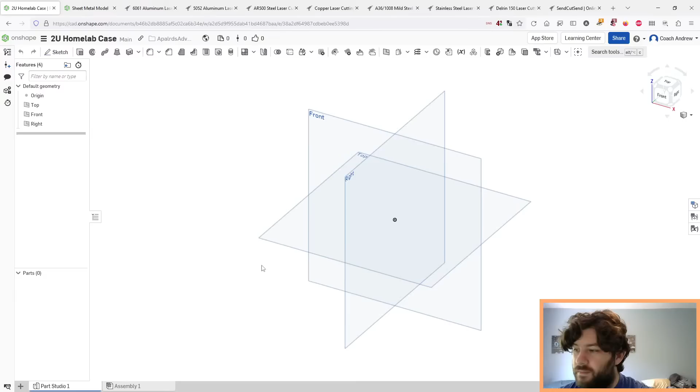So for inspiration, I kind of want it to look like this. Not the trash can. The, like this. This looks really beautiful to me. I know it's wildly expensive, but I just like the design of this. So I want the front of my server to be aluminum, like nice looking brushed aluminum. So yeah, it is a gorgeous case. You're right. I'm not going to buy one and turn it into a low-end server. That would cost me more than the rest of the server combined.

But we can make one out of aluminum. So our options here are 6061 or 5052. I believe 5052 is cheaper. Also, we could make it out of copper if we want to pay a ton of money. AR500 tool steel. Yeah, most of the case, I think I'm going to make it out of mild steel. Could make it out of stainless steel. So, yeah, stainless.

Motherboard inserts and stuff I could make out of Delrin, or I could use rivnuts they make. And yeah, so most of the case, 5052 can be more easily bent. SendCutSend won't bend 6061 at all, but that doesn't mean it can't be bent. It just means that they won't do it.

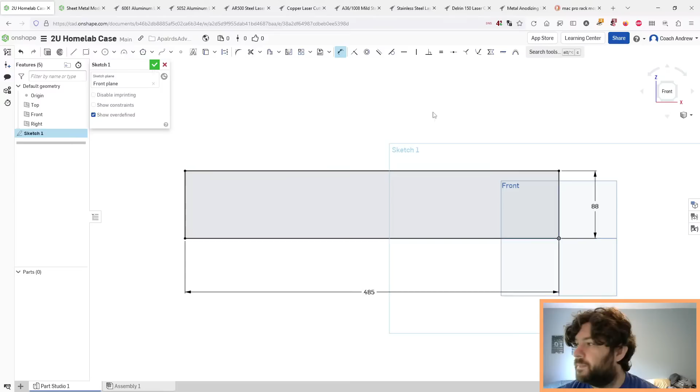And we're going to turn that. Actually, this one's just going to be a plate, I think. So thinking of construction methods, I guess I could pull the other one over here. Basically, I wish I could draw on my screen.

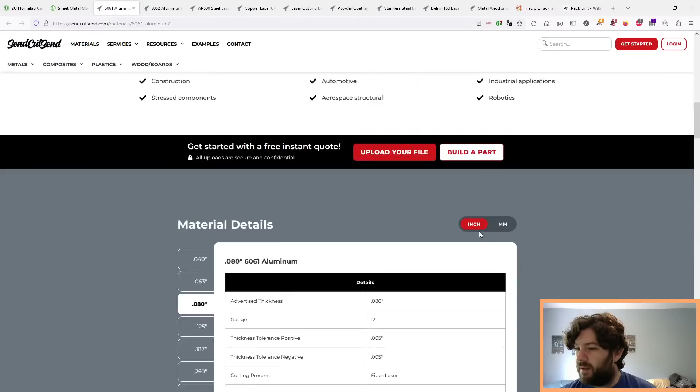Okay, so we are going to make the front panel out of 080 aluminum because it's beautiful. So in that case, we are going to make you sheet metal. Yes, do sheet metal. Thicken. What thickness is 080 aluminum in metric? 2 mil. 2.03 mil, bend radius of around 60, 61. It has no bend radius. So I'll take the one from 50, 52. Not properties. 2.9 mil, material, relief. Yes, I like you. Okay. We now have a panel.

Yeah, mounted as a shelf for support. I actually have a... it's going to sound awful. I have a UPS on the bottom of my rack that kind of holds up the stuff above it. And then all the switches go down from the top, and the servers go up from the bottom, and in the middle there's just a gap. And I used to just set my cable modem on the gap, on the server. But that got really irritating, so I got a proper shelf. Cable modems, it's the worst. Yeah, the UPS was designed for two-post network racks. So I looked at the hardware and I'm like, there's no way this supports that huge battery overhang, but it does.

Math. So I'm going to do 3 holes apart, which would be 0.625 times 3 into metric. 47.625 millimeters. So your dimension here to here is 47.625 metric. You're going to be the same. Let's see, so my total height is 80 something. I need to split the difference here.

So what would this dimension here be? So that's 88. And we want to do vertical. 88 minus 47.63 over 2. And then we'll just set it equal to... I'll go in this dimension, please. Yeah, 0. Okay, so how far apart are you? Wikipedia.

What is the width? Pitch of the holes, not like the 19-inch. I'll just measure it. In real life. 47. My current one has slots. I need to make slots.

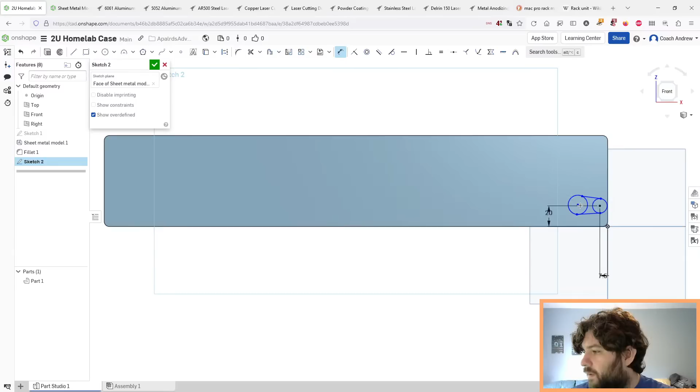Measuring tape. 46 and a half. 462. Oh, minus 470 minus 462 over 2. Yeah, it's tiny. And you need to be horizontal, you to you. Nope, does not like that. Yes, we'll dimension you in this dimension. How big are rack holes?

Number 12. Jesus. M6. Okay. Pretty sure my rack screws are massive. They are the universal square type. So an M6 would be a 6 mil. So you need to be bigger than 6 mil. So you need to be like 6.25 mil. I think. Yeah. And you need to be equal to, whatever, I'll just retype it. And you guys need to be tangent.

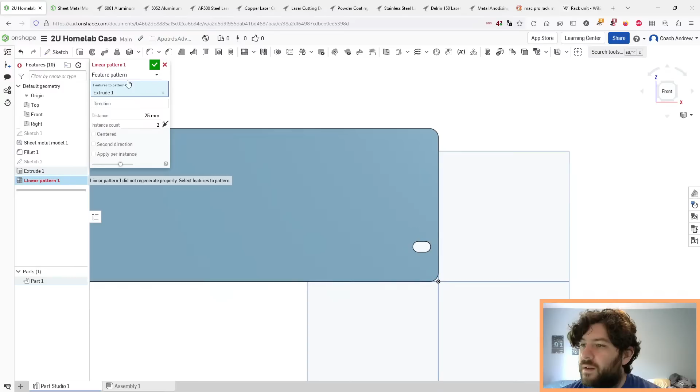Feature extrude. Direction. We're going to go with Z. How do I pick Z? Feature to pattern. Extrude. Direction to pattern. No. And to pattern you on the face. Why are you having such a hard time? That looks right. Okay. In that dimension, and you need to be 48 mils. Boom. Actually, it's not 48. It's, God. 47.625. Okay, now we got you.

Now we're going to take you two, and we're going to pattern you. Please. Pattern you. Feature pattern. You and direction is going to be this way. And how far apart are you? Measuring tape. .66. .466. Finally. Have a face. This is our faceplate.

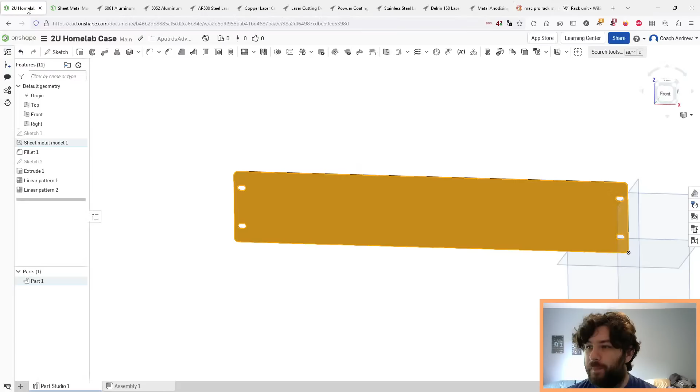Okay, so what pattern do we want to put on the face? Our inspiration is the beautiful Mac Pro. So I'm going to sketch a hole and do a bunch of holes. Nope, we're not going to extrude. We're going to sketch. And we are going to make a hole. How big should it be? 33 mils, that's a bit big. How about 16? Yeah, let's do that. Okay, you're going to be the first hole.

Oops, you need to come from here to here dimension. Maybe a little bit closer to the edge. 60 mils. Yeah, that seems reasonable. I'm going to have, I don't know, 3 rows of you, so we need to fit, come on. Sketch lines in the middle. Yeah, you're right, it would be. That might make the rest of this faster, too. We'll see. 24 mils, 20 mils. You know what, 88. Maybe I should do 24 for you. 14. It's too close to the bottom. 18. That looks good.

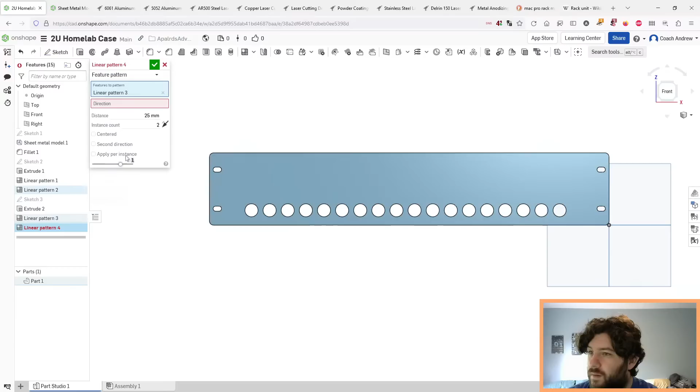Okay. Now can I take my pattern and pattern that? Feature pattern. You guys are going to go in this direction. We're going to be offset by 25 mils. Second direction. Oh, that would make a symmetrical grid. I want an asymmetrical grid.

Let's rethink our life choices a bit. Yeah, so maybe I need another one that's offset. You, sketch 4. Come back. How big did I make you? 22. I think I made you 20. Made you 16. Okay. 16 mil, we decided. 15 mil.

There to 38. 36 looks reasonable. 40. Meh. 50. Meh. 52. 48. Let's try that. Oops, nope. Stop. To do you and remove through all. Okay. Now I have two holes.

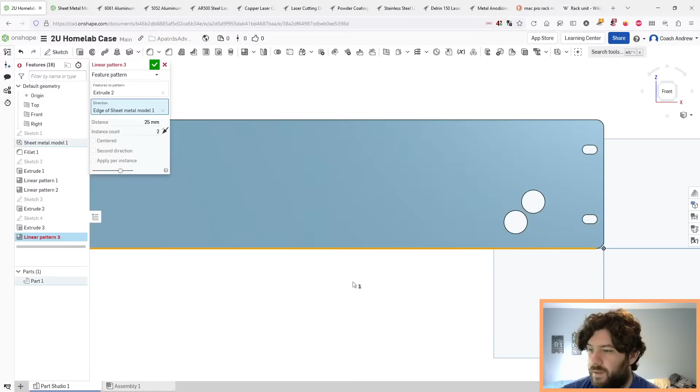Now I can pattern these two holes separately to make my pattern. You are a feature pattern, and your feature is extrude 2. And the direction is going to be that way. Direction. That way. Reversed. Actually, if I do it this way, it'll let me know if they're lined up. That looks pretty lined up to me. I'm pleased. Okay. Now I need to make you go all the way across. I think I need 16 of you. 16. Might be too many. I guess we'll find out.

And now next we have to pattern the next one. Spending so much time on this beautiful front panel before I even make the rest of the case. Features to pattern. Extrude 3. Direction. Edge. Flip. You're also going to get 16. Yes, I like that. Now we're going to pattern you up.

So we're going to pattern feature extrude 2 and linear pattern 3. Direction is going to be up. Nope. Direction is going to be up. And you're going to be in the other direction. 25 is too low. How about 30? I don't remember what dimensions I typed. That doesn't look right. That looks too tall. How about 28?

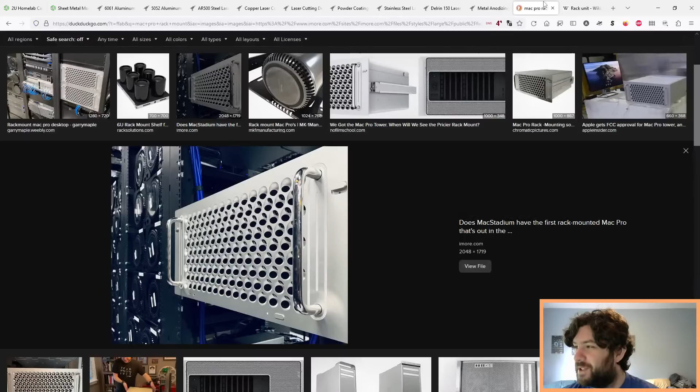One more linear pattern. I'm just going to do through holes. My actual plan to make this look better than the cheese grater was to have 2 layers. So the first layer would hold the through holes, and the second layer would hold the fans. So I could put an offset set of through holes to make it kind of look like a cheese grater without having to actually make a cheese grater. Because making a cheese grater is a lot more expensive than making through holes. But if I have my fan piece behind it that mostly looks like an offset of holes, I think it'll look pretty good. So now we need to pattern the middle row.

Up. So we're going to feature pattern. We're going to pattern extrude 3 and linear pattern 4. And direction is going to be that direction. You're going to go up. I think they are 20 mils. No, that's not right. 26. 28. That looks better. Okay. So now I have something with good airflow that resembles a Mac Pro.

The other option I have is to just acknowledge that it's not going to be as nice looking as the beautiful cheese grater here, and just have a big bunch of through holes. Okay, so we have a front panel. And I should probably rename this to front panel. So now if I go back to my folder, I can start making a tray for the motherboard. Come on, Onshape.

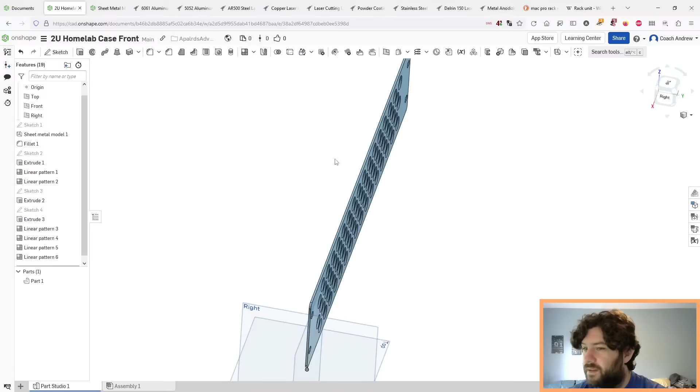I don't know. I like the look. I'm going to keep the cheese grater exactly how it is. Okay, so now we need to take you and features. The left one looks better. So I need one less hole on this side. I need to change the spacing. I'm going to leave it. Create document.

Motherboard tray. Okay. Now we get to the fun part, laying everything out. So this will be somewhat based on what I have space for, because I think I have space to go 50 centimeters. So your sketch is the top plane. I'm just gonna draw a rectangle, and that's gonna be the inside dimension of the case. And this will form the motherboard tray. You are currently 40. You are currently 43.5. Okay, so we're going to be 430 wide. So this is the inner dimension, because then the flange goes out to mount to the rack.

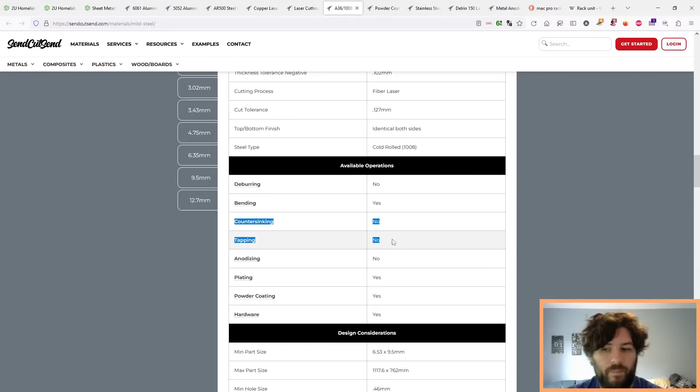Please thicken. And we are going to use mild steel. My options for mild steel are 030, 048. 048 is probably thicker than I need. That is 1.22 mil, so 1.125 mil. I really like 1 mil, but it's probably strong enough. Certainly strong enough. So this one can get press fit hardware, powder coating and plating, and bending. I don't get countersinks. It's too thin to tap and countersink, and that's fine. I'm not going to countersink my motherboard tray.

Let's see. So you are sheet metal 1.22 mil. 1.22 mil bend radius. 1.4. 0.87. Bend deduction, that's the one I need. 2.18. Material, K factor, 0.38. What are you mad about? Come on. Oh. That's a big face. Okay. There we go. We've got a motherboard tray. Congrats. So I need to think about how big my motherboard is going to be.

So if I look at Wikipedia, ATX form factor. I think they have dimensions here. So I'm doing micro ATX because used micro ATX motherboards are really cheap. But I also want to be able to fit full-size ATX. So that's going to be my assumption. So 305 by 244. Let's go make a sketch that is 305 by 244, and that is going to be the motherboard. Actually, what dimension's what? Okay, 305 is height. 244 is depth.

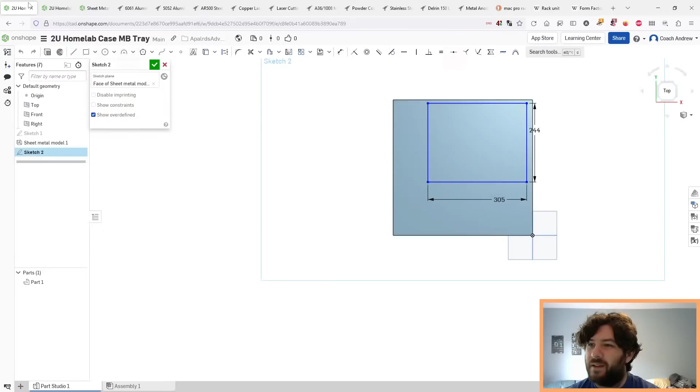Yes, I know this will be more expensive than the motherboard and the rest of the electronics. Part of the other thing is I already have a micro ATX motherboard, and I already have a second micro ATX motherboard on the way. Basically, yeah, I know the case is going to be more expensive than the rest of the electronics. The CPU might be more expensive than the case. The GPU definitely would be if I put a GPU in.

Goddamn crypto miners. Actually, thanks to the crypto miners, we can now get used GPUs from a couple generations old that had a hard life.

So there's the micro ATX. Also, so I'm thinking of what I/O I need. I need a CPU, obviously, and I need RAM, obviously. I want a 10 or 25 gig card.

A 10 gig card can use a PCIe lane off the chipset. Even PCIe Gen 2, I think Gen 2 x4 is fast enough for a single 10 gig, and Gen 2 x8 is fast enough for a dual 10 gig or a single 25 gig. So I don't need two graphics cards. I'm planning on putting a graphics card in these.

I currently have, digging them out here, the two NVIDIA Tesla P4s. I bought these back when Craft Computing did a video on them, and they were awesome.

What's going on here? YouTube is stuttering. Happy again, YouTube? Stream is healthy. I don't know why the stream is unhappy.

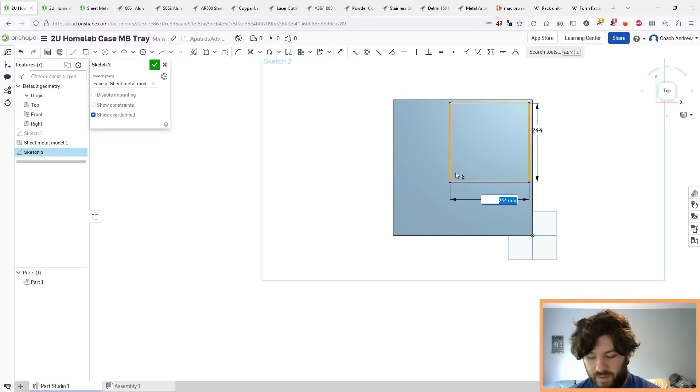So basically, I need 2 PCIe devices in each server: one is the networking card, and the second is the graphics card. And then, what else? The motherboard will have 2 M.2s, I think, and 4 SATA. That's what I have right now. The plan was to hook all of my drives up to the internal SATA on the motherboard, which means I can't use SAS drives.

I know I asked the question and people said they wanted up to 4 hard drives or up to 8 SSDs. My plan was essentially to build this thing to fit 4 2.5 inch SSDs and wire those straight to the 4 SATA ports on the motherboard. That would let me build a ZFS RAID Z1, or I could use it as 4 Ceph OSDs in a cluster. I think 4 2.5 inch drives is reasonable for most people now.

I don't think 3.5 inch drives have a ton of life left in them for daily storage. For archival storage, they're still great. Or for backup storage, your second tier, the SAS 3.5 inch drives are awesome because you're not as concerned with speed.

Yeah, latency. Latency with Looking Glass is not bad. Looking Glass does a frame buffer copy straight out of the GPU, so it doesn't capture the HDMI. As soon as the frame is rendered, it takes that frame buffer and copies it into the memory of the host from the virtual machine.

So the virtual machine has its GPU and it's rendering on the GPU. As soon as the rendering is done and the frame is ready, it does a memcopy out of GPU RAM into host RAM that's shared by Proxmox, where it can then take that and composite it on its own Radeon card.

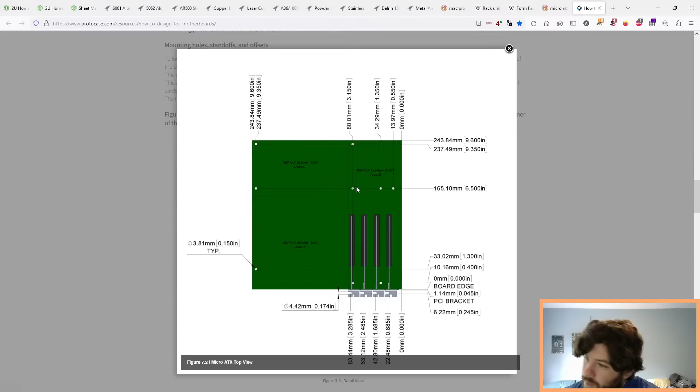Somewhere down here they had ATX board, micro ATX board. There we go. Okay. That's a PCI card. There we go. So they're doing 3.81 mil holes. Keep out area A, keep out area. So where are they referencing their dimensions from? They're referencing from this corner down here. Okay, so that will be my reference.

So I need 1, 2, 3, 4, 5. That's a lot of mounting holes. Let me look at the motherboard I have. B450. I think it's this one.

Yeah, this looks like the board. So it has a hole 1. Do you have like a front? Yeah, there we go. So this is the top. So 1 mounting hole, 2 mounting hole, 3 mounting hole, 4, 5, 6, 7, 8, 9. So they skipped out on a hole here, I think. And this particular hole here they skipped out. Because that one down there doesn't count because it's not plated.

1, 2, 3, 4, 5, 6, 7, 8. Okay, so they skipped out on the bottom one here. Or did they? Yeah, they skipped out on the middle one here. Okay, so I need those holes. So they are 3.81 mils. So 1, 2, 3, 4, 5, 6, 7, 8. And we're referencing from this corner in this diagram. 3.81. 3.81. 3.81.

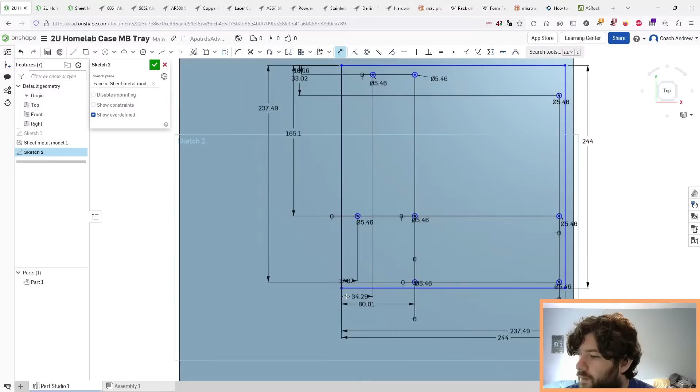Okay, that is the motherboard tray for a micro ATX board. So now where do we want to locate it in space? So the cards stick out the back. So, nope, go back. I liked that picture. Top view. Okay, so at 0 is the board edge. So at 1 mil is where PCIe brackets want to start sitting at. So I'm going to put the board edge 1.14 mils from the edge of my case, which would be U to U. Right there.

And where do I want to put the board edge in that dimension? Give it some space for wiring. How much space do you need for wiring? How about a centimeter? 10 mils. Okay, fully constrained. So now all of these holes need to get drilled. One, two, three, four, 7, 8. We're going to go all the way through.

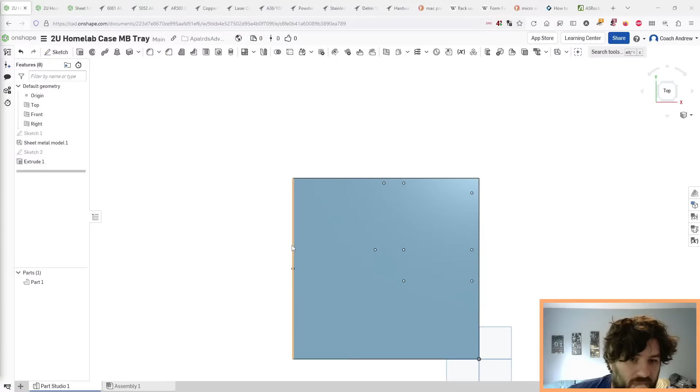So I go back to my front plate. Where do I want to attach to? Because I don't want to put too many screws in the front plate because that would look ugly. But I could put some big fat flatheads and countersink them. That would look nice. What hardware do I have? And nuts. Press nuts. M6. Big fat M6. Maybe M5.

Yeah, so printing would be more of a temporary thing. Sheet metal would be rock solid. The other thing is I kind of want to mount these sideways, so I could only hold them in by 2 screws and just overhang them. The other option is I could build a flange that goes on each side and then has a flange to screw down, and I could just put the fan in the side.

Because I kind of want to mount these, going back to my CAD, in this orientation, with the cables coming out the side, so I can route the cables like this instead of having the cables come out the back. That's the thought.

I could just build separate brackets for the drives too, or I could hold the drives in with double-sided tape because they're super cheap Amazon SSDs. I know. Or I could put some PEM nuts in the design and make the option to use either a hard drive or an SSD caddy, and make 2 different versions of the caddy that bolt onto the same PEM nuts in the motherboard tray.

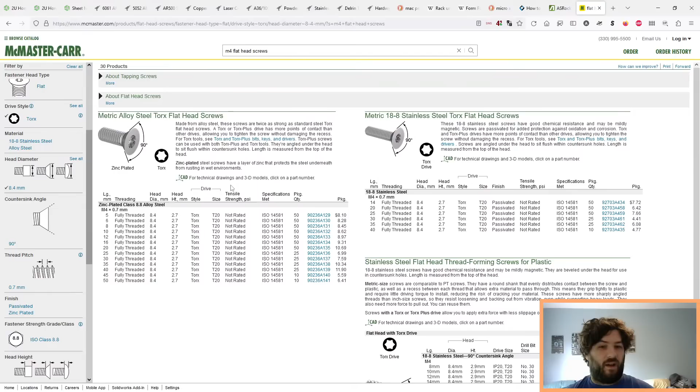Fastener type flat, drive style Torx, head diameter. Okay, so you're going to have an 8 mil head diameter, and your countersink is 90 degrees. So how deep is that? Because the thing I'm worried about is I'm using 1 mil thick steel for the top of the case. And if the screw head sticks up, that takes away from my total thickness, because I don't want to hit the next thing in the rack unit.

So maybe instead of the flange flipping over, the flange should be part of the other piece. So I'm going to delete those flanges, and instead put the holes on this side and make the top flange down. I could flathead, but I'm only using a 1 mil thick piece of steel, or even less. Maybe I set it at 1 mil. Okay. What is that in inches? 0.048.

That's what I'm using for the motherboard chassis, so the motherboard case, which is the bottom, and also for the lid. They're going to be 0.048 steel, and I'm going to paint them black, or just leave them. I don't know, depending on how much it costs. So 1.22 mil. So I should lower these. Yeah, I guess we're okay.

So now here, we're going to sketch on you. And we're going to make some holes for the bolts. I'm not going to countersink them. I'm just going to use M4 button heads. And I'm going to use 6 of them to hold the lid on, because it's structural. The lid is structural. I'm not going to have any rails on the inside to support the server when the lid's off, because this is supposed to be low cost, well, lowish cost.

So you need a 4 mil, so I'll make you like 4.25. Itty bitty, okay. You're also going to be 4.25, because this is a clearance hole. So then I'm going to use a button head through the motherboard case and into the PEM nut that's in the lid. Or I put the PEM nut here and I have the lid wrap around it. Which one of those do I like better?

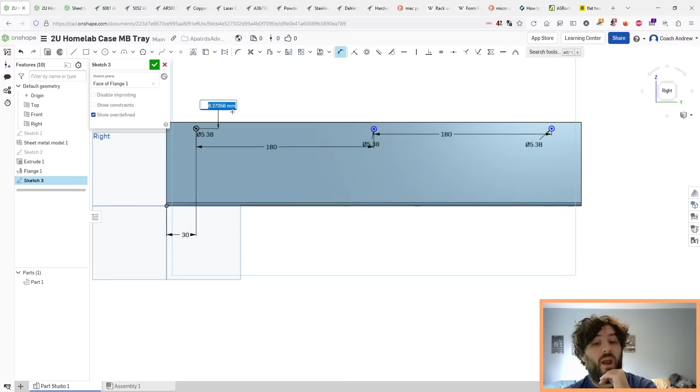it's going to have a 20 mil flange. It's a 20 mil outside flange. So I should have this flange end a little bit low to have an undercut for the bend radius of the top surface. So 5 mils is too low. What's your clearance to the edge? Center line to edge, 272. So you need a 7 mil clearance to the end. So I'm going to put you at 9 mils.

And then I'm going to take another mil off this flange. I already took some mils off. I'm going to take one more. Sheet metal thickness, 48 thou, which is 1.22 mil. Oh, and yeah, so your holes need to become not a figment of sketch. So we're going to move you, move you, and one more, and we're going to go through all. Then I'll cut the other side at the same time.

Is it enough to sink the PEM nut in it? So if I look at this from the front, the top lid is going to come over the top and then bend around the outside. So the PEM nut is going to be on this side, and the fastener is going to come in from the outside through the lid, then through the wall of the motherboard tray and then into the PEM nut. So that's going to compress the PEM nut. So the PEM nut is going to be in compression. It'll be fine.

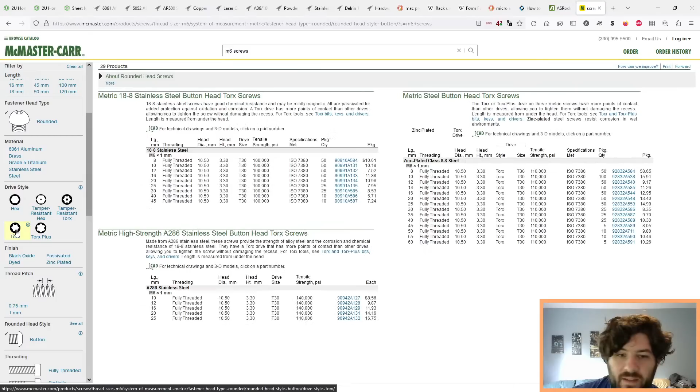So that leaves me with stainless or steel. So this is what it looks like, and those are going to be in the slotted holes holding it up. So then I want some more screws that attach the motherboard tray to this piece and the lid to this piece, and then I'm going to flange out the motherboard tray so that it sits behind these slots here and also gets held in by those slots.

So for the screws in the middle, do I want to use big stainless M6s? Or should I use like an M4 flathead? Probably use an M4 flathead, shouldn't I?

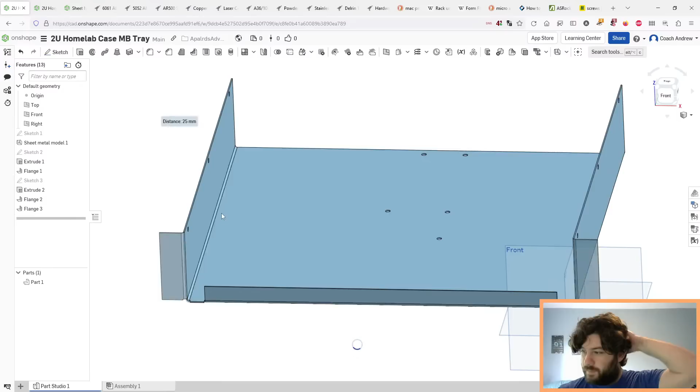So this is basically going to sit in front of the rack rail, and it's going to have a slot in it so that, in its final form, this piece can go in front of it and look beautiful. And that will also give some stiffness to it. Okay, so I'll make those slots later, and I'll make these PEM nut slots later. So that is the motherboard tray, I think.

I'll probably have to project stuff later for mounting holes and stuff, but I should figure out how to make assemblies in Onshape, because I still don't know how to do that. Yeah, I haven't done sheet metal design in a while. I am actually a computer engineer, but I hung out with enough mechanical engineers to learn some things.

Versions and history. How do I add a part? So I'm in part design. Oh, you're a part. Maybe I should have done this all in... Oh, assembly. Yeah, that's what I wanted, is assembly. Insert parts. Now, do I have to put you all in the same... I put you all in here.

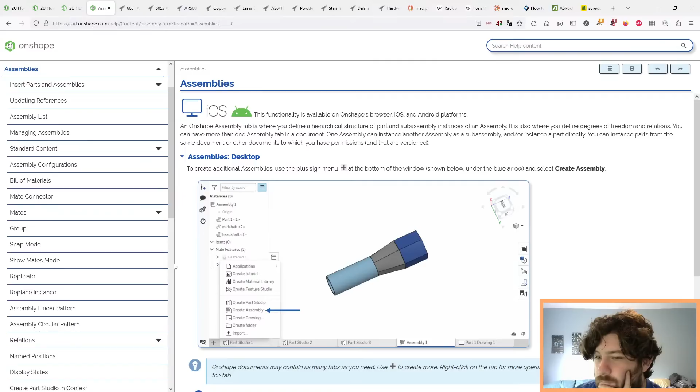Yeah, so I started with other CAD programs where you had to create a separate file for every single part. And I know Onshape appears to do it differently, where I can make a single file that has all of its component parts part of it. Whatever, we'll go to assembly. Insert.

Okay, there we go. We added that part. Now we're going to add front. Beautiful. So you guys need to get stuck. Planar mate. Actually, would it be a fastened mate? Pin slot.

So Onshape is made by PTC, so they're like the creators of Pro E and stuff. This does not go straight to the fab house. I have to export this as a DXF to send to SendCutSend.

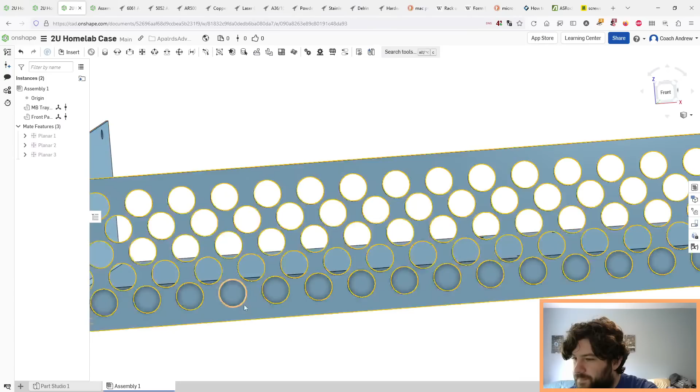So this piece should be fully constrained. Oh no, that flange looks awful. It's covering up my beautiful mounting holes. Yeah, I'm gonna have to fix that. That is not acceptable. We cannot cover up the cheese grater holes. Cheese grater holes are special.

Stop it. Sorry, my automated blinds are closing themselves because they detected that it was time to close themselves because they're automated.

Okay, here's where we are. Have motherboard tray. Yeah, I never used a space mouse, so I didn't, I guess. So I gotta get this to not block my holes. Go back. Can I just bring you in here? It's really irritating.

There, sorry, my automated blinds were automating over and over again because it should be time to close, so they keep trying to close. I don't know what's going on.

So how do I make this not? I could just cut a bunch of holes out of it. Yeah, I don't do enough CAD to use a 3D mouse, I think.

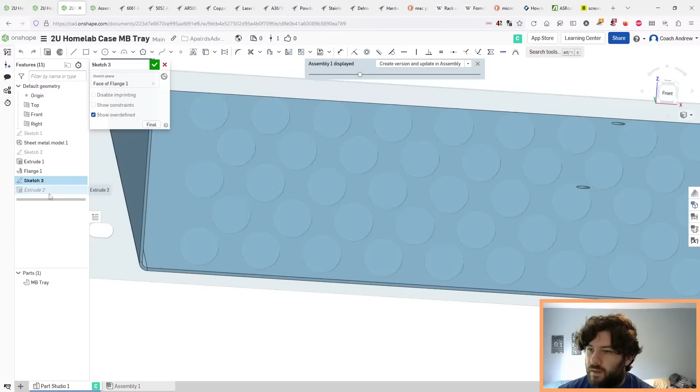Flange 2. What are you mad about? Or did I delete the wrong things? Come back. You. Okay. You're important. Okay, so flange 3 has moved in front of flange 2, so I can delete flange 2 without losing flange 3. So now the question is, do I do a contour flange? Tab.

Something is off here. This is way too big. Oh, I see what's going on. Maybe mount the front with standoff screws. And filter mesh. Yeah, actually, that's a good idea. I like that. The other thing I realized is that I constrained the... If I go out of here into the assembly studio, I need to go back to... Oops. Keep opening new tabs.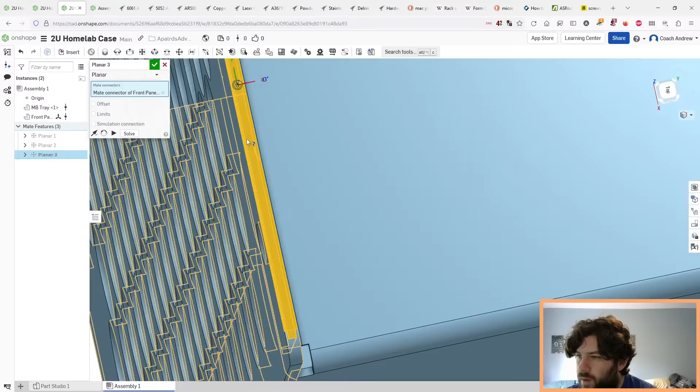What did you do? What just happened here? Okay, so you... Oh, what is going on with this? This should be mating... Let's mate those surfaces. So now I need to mate these surfaces. Planar mate. From you to you. Go. Okay, that's better.

Yeah, so I get that. The mesh could be a contrasting color. So I can't make this flange thin enough to sit under these. I could cut out every single one of these. Not a constraint, though.

So if I did that, it would mess up the dimensions, because then the flange sits further back, which makes the inside a bit funny. This geometry in this corner here would be a bit odd. I guess it already is a bit odd, but it would be a bit more odd.

So how many of these do I have? An even number or an odd number? 1, 2, 3, 4, 5, 6, 7, 8, 13, 14, 15. I have 16 of these. So I could put a fastener directly in the middle and one off from each end. Then I would have 3 M4 screws that would go in through the aluminum into the plate.

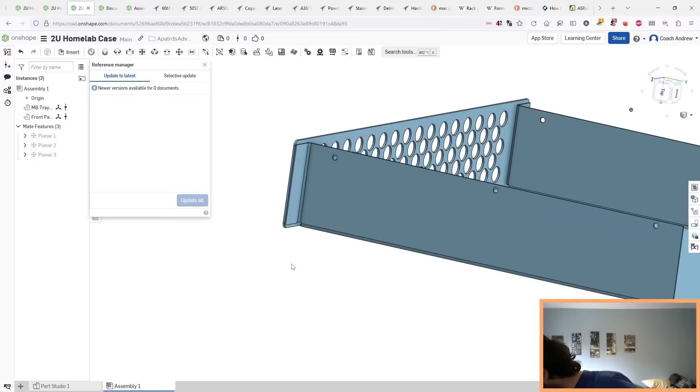So currently the only structure holding stuff together is this flange here, which would take the load, and I don't think it would bend. I could rely on it not bending, I guess. How is my current one held together? So this is the server I'm looking at, how it's been constructed. It looks like they added a gusset in the corner that just goes to make this bend thicker. So there's 3 pieces of metal, one of which is the face, which is bent over and screwed on the bottom. So the face wraps around and screws into the bottom.

Except I don't want to bend my face because my face is beautiful. My cheese grater. So then the next option is, okay, they have a second piece of metal that comes up and out, and that is what I have as well, and they have a gusset. Okay. How about the smaller case?

Oh yeah, something I forgot. A lot of these cases have a screw-on rack mount bracket that is not all that big. How thick is this bracket here? Maybe it's steel. Looks like about 2 mil to me. Dial calipers say 85 thou. It's like the thickness I'm using. What thickness is that? 85. 2 mil, okay. 2.2 mil.

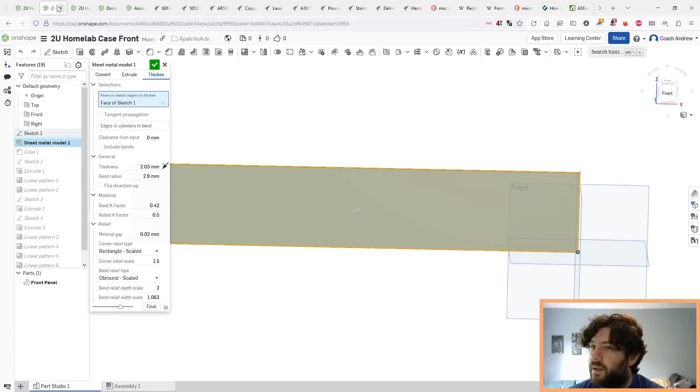So what I'd basically do is make my beautiful cheese grater a bit smaller, and then I would flange that, make it a 5052. So that's 2 mil. Yeah, I could do a flange to the top cover too. I was just thinking that this would be easier to nest together. So let's try that. What's my bend radius? Well, what happens if I just add a flange? It is a sheet metal model after all. 2. You're going the wrong way. Okay, that way. And I want my dimensions to be flange alignment in.

Okay, so I still have a material thickness. So I need to reduce the thickness of my part by 2 material thicknesses, which is 4 mil. Distance is going to be 20 mil. And these are going to be partial flanges. How big were my flanges on this piece? Because they need to be that same size. How big are you? 27.5 mil. So they need to be 27.5 from the end. And a second bound, also 27.5.

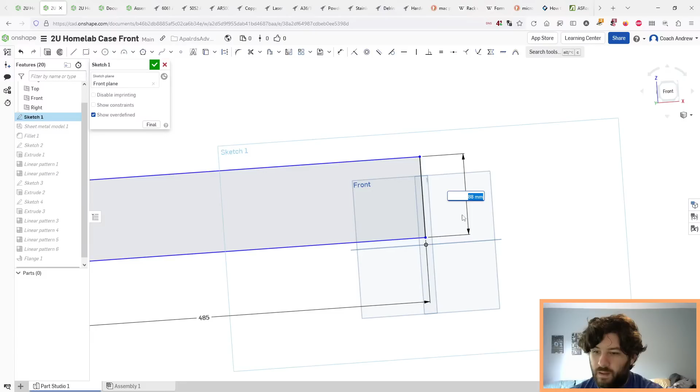So I need to lose like 4 mil here, back in my original sketch. So you're going to become... you need a full-length flange. I can't full-length flange because there's rack rails in the way. I can only mount to the front face of the rack rail, and I can't bend around the rack rail. I have to come in from there.

You know what? I've decided I am going to revert to the last version. There we go. We're going to stick with the flat plate, no bending. And at the assembly level, we're going to stick with this. So the other thing I could do is I could add a stiffener to this corner, just to thicken it up a bit. That's what the case that I looked at did, but they're using a thinner steel than I am, I think.

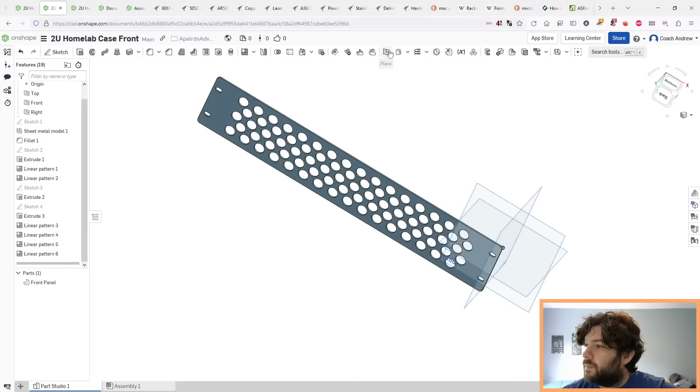Can I make a new part? Yeah, so the mounting ears are part of the sidewalls, and this piece, I just didn't cut the holes in them yet. So these are going to layer the front panel and the sidewalls. Okay, so now we're going to make the fan shroud. Just make a new sketch off this. Does it become a new part? No. I guess I'll just make a new part. Fan shroud.

So how many fans do we need for a 2U system with power supply, RAM, 10 gig card, I don't know, 3 fans? They're going to come from Noctua because I want them to be quiet. Products, fans. Come on, load your fans. Size, 80 mil. Connector, 4-pin PWM. So these guys can do 55 cubic meters an hour, so that's like 32 CFM. I like very much.

Noctua NF-A8, how much does that cost? NF-A8. 24 bucks. That's the whole cooler. That's the fan, 16 bucks. 3 of them? I'm spending more on fans than I am on like 10 gig cards. What if I just ask Amazon for a cheap 80 millimeter fan? 80 millimeter PC fan. Kingwin. 4 bucks. In any case, it will use the same mounting dimensions. Hole spacing, 71.5 mil, okay. So back to you guys over here.

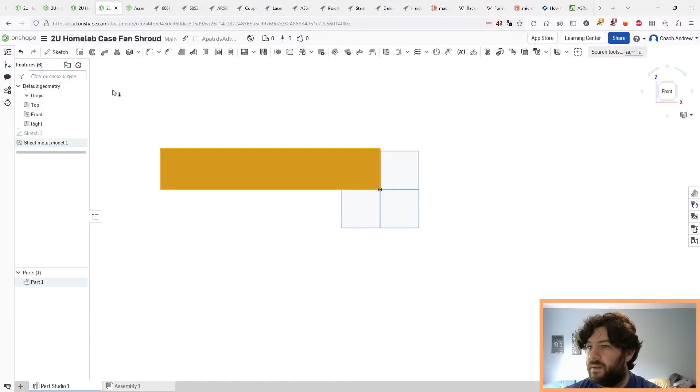Base of sketch, thickness. Do we want to do this mid piece in aluminum or in steel? Steel is cheaper, I think. Okay, so then the fans. So let's sketch out where the fans are going to go, and I'm just going to pattern them. So I need a big ass circle for the airflow of the fan. Noctua. So your 80 mil outer diameter, how big is the fan itself? So mounting holes are at 71.5. So I'm going to say 71.5.

Hello, good afternoon.

Okay, this is going to be halfway up, so it's going to be 40 mils up. Not 40 mils that way. No, 80 mils this way. 40 mils that way. So that's my hole for the fan. So let's make that a hole. And I'm taking a ton of material out of this piece, but I don't really care. It just holds the fans. So you're going to remove and you're going to go through all. Okay, so now we need some holes for the mounting. What size mounting holes does Noctua use?

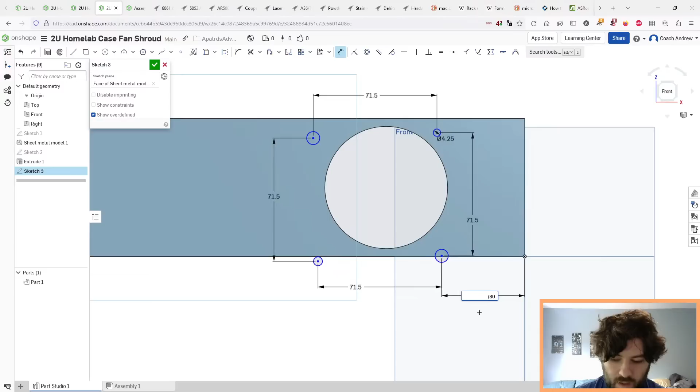.154 would be the close fit. 4. Okay, so it's probably about an M4. So I'm going to say we're going to make an M4 size hole. So it's going to be, nope. 4.25 mil, and it needs to be from the center of the hole. You guys need to be 71.5 apart. And then you, from this dimension, need to be 80 minus that.

4.25, 4.25. Okay, new height. You should be 80, 40 minus. Should be there. Zero. There should be 0. There we go. Okay, so that is my hole pattern for the fan.

We're going to go through all. Does that hole look big enough for the airflow of the fan? Maybe I should make it bigger. 2 mil gap. Let me think about 2 mil gap. How much do I like a 2 mil gap? Yeah, it's fine. So now I need to pattern these pieces for my giant fans. So where's the pattern button? There it is.

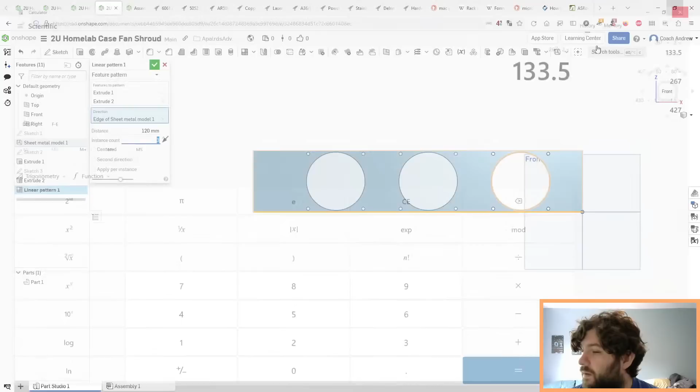Minus 427. And 133.5. Should be perfectly evenly spaced. Okay, there we go. 3 fans. They fit between the bottom plates. So this plate here is exactly 80 mils tall, which is the exact height of the fan. The chassis, so this plate here is 88 mils tall, which is the height of the 2U slot.

So this is 86 mils. So I have material thickness on the top, which is 1.2 mils, material thickness on the bottom, which is 1.2 mils. I want to leave clearance for this radius in here. So basically there's going to be like a 2 mil. So 88 minus 1.2 times 2. Yes, it's going to be a 2.5 millimeter or 2.7 millimeter gap on the top and the bottom of this plate, all the way across. Because this plate is not going to touch the top and bottom perfectly. And I'm doing that because I'm sure the fit and finish is not going to be within a millimeter.

So this will hold the fans, and then, yeah, so we are a sheet metal. So now I can do flanges, and these are going to come forward, and you will see the genius of this design soon. So these are going to come forward by, how thick should I have between the front face? I don't know, 30 mils? And you're going to be aligned outer. And then you're going to flange out like this. Not like that, like this.

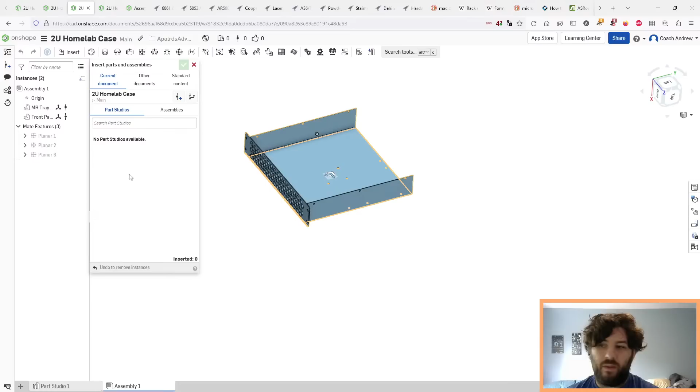Not with hardware bolts and nuts, you need to tap the mounting holes. So my rack has the cage nuts, so I am going to mount it with, a lot of these are the rack screws going all the way through. Front panel. And shroud.

And shroud part 1. Yeah, there we go. Okay. So now you need to get unmated. Oops. So you should be able to come out now.

Planar mate top surface of this to the top surface of this. So this is going to kind of sit like, come on, stop being dumb. I'm going to make you grounded.

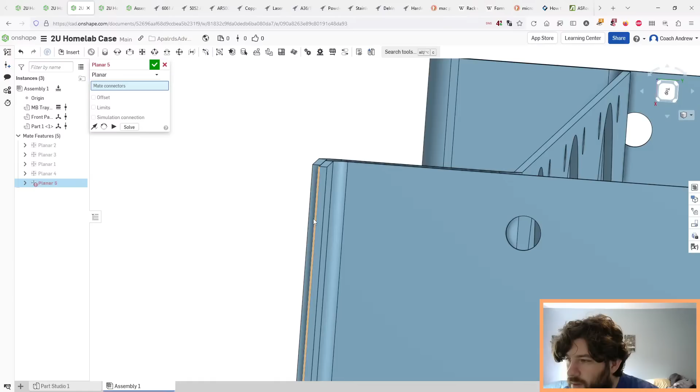So now we need to mate some stuff back together. So planar mate you, you. And I already did the top, so now I gotta do the ends. So this end is my reference. Planar mate you to you. Does the other side look like it's good? No, it looks a bit off. Oh, I know what I did wrong.

I'm subtracting the material thickness. So you need to get 1.2 added. Actually, what number did I use for that material thickness? 427, so I used 1.5. So you need to get an extra 1.5 on each side. So you need to be 29. Okay.

Version U. Mounting hardware. Oh yeah, bolts and nuts for the fan. So M4 bolts and nuts. You can get updated. There we go, that fits better. So now let's reconstrain this to this. There we go. Okay, so there we go.

So now I want to put a bolt through this gap, and I can just use a regular hole and a bolt. I don't even have to use a PEM nut. But I could also use a PEM nut. So now we're going to go to U, change your hole pattern a bit. Just this one. So we need to move it 30 mils back. So you're going to be 60. This holds the top on. Actually, I'm going to delete one of these. I don't think I need...

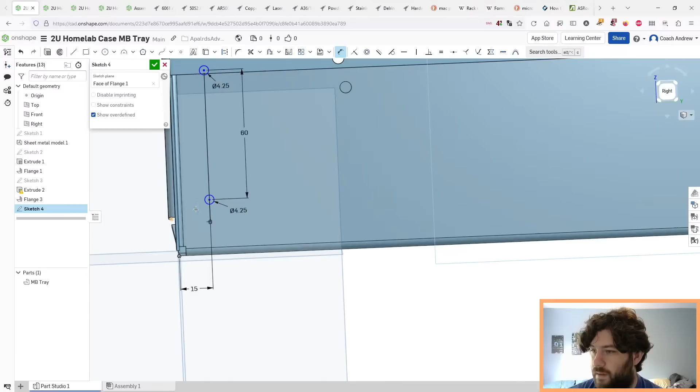It's coming back from here in this dimension. I want to be 15 mils. So that face sticks out. I don't want that face to stick out. I should change that. And then U to U is going to be 0. And you guys vertically, you're going to be 60. And you from the bottom, you're going to be 20. No, you're going to be 10.

No, the reason it's the shape that it is because it adds stiffness. So I bolt through from this piece to the fan mount, and it basically also adds a gusset in this corner to make this corner stronger. That's why the fan mount does what it does.

Okay, so then I also want to change this. We'll extrude this first.

Hello, I'm doing well.

I'm gonna go through all. Why did I lose a hole? Supposed to be 2 holes. Supposed to be that one, you're supposed to be that one. Okay, that looks good. So then this flange here needs to be an outside flange, not an inside flange. Yes, I agree. Now let's version that, go back to the document, update your versions. Come on. Okay.

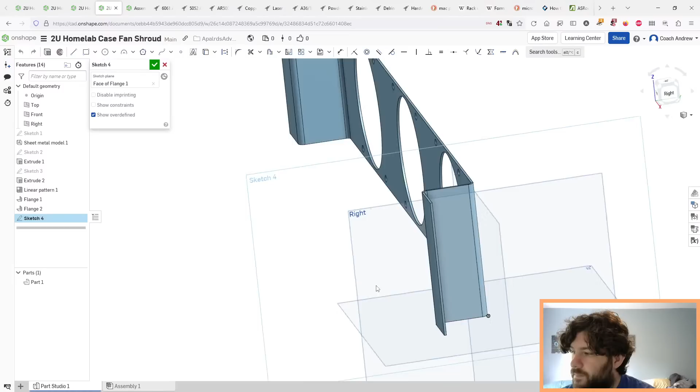538. And apart, I think they were 60 apart. Looks about right. 15 from the top. And they're also 15 from this edge. That one's a 0 from the other one. Oops.

Screws holding the fan mount to the sidewall need to be sunken. So they could either be countersunk, or I could rely on the fact that I actually have a bit of clearance because I made it a tiny bit smaller than the rack to begin with. So you two, come on, through all. That looks wrong. What's my dimension here? 60, yeah. 15, yeah, okay.

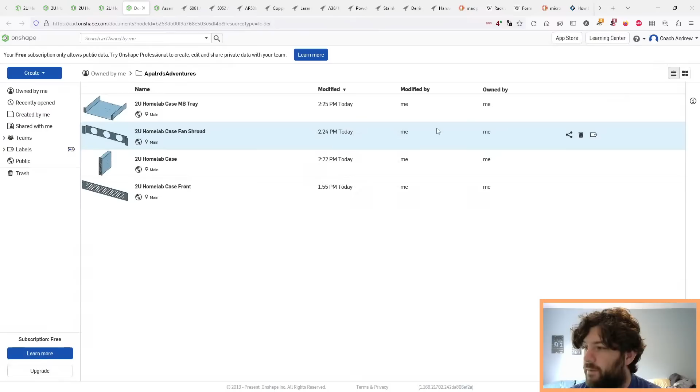I should just make a folder for these. I can drop them all in the folder. Then I can stop naming them all home lab case. So you're going to be top. You're just called fan shroud. You're just called case. Case assy. You're called front. You're called MB tray.

Let's try to remember our dimensions here. So we were going to be 430 by 420. So I'm on the front plane. So you are going to be... I am going to make it at SendCutSend out of sheet metal. So 420 deep and 430 wide.

Depth should, let's take a look at the assembly. So I need to cut a tiny bit off my depth due to this corner here. Actually, I just need to do an offset flange, which is fine. Probably offset all the way back past this so I don't get this screw. Or I could grab that screw. If I made that screw at 10 mil, then I could screw the case with that same screw.

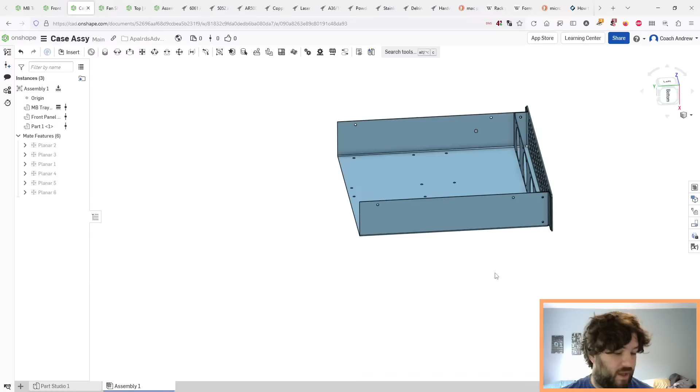I also watched the horror of Linus Tech Tips building his own case and decided I could do better. Those were his gaming PCs, though.

So this is what we got so far. We got a motherboard tray. These are all cutouts to use PEM standoffs, and they're going to be Imperial. Come on, Imperial. Reload. Yeah, so they're going to be the thicker ones, these guys. So standoffs, number 6. So these are going to be our standoffs. So 6-32, we're going to hold the motherboard up.

They're going to sit here. The motherboard's going to sit in that corner. So then we have space for power supply down here, and I can put some drives across the front sideways. I think I could fit 3.5 inch drives here. I can definitely fit 2.5 inch drives here. So then I've got this beautiful front plate. Our inspiration for this is this beautiful Mac Pro.

What about rails? Nope. Partly because of my own rack. So I have a 2-post network rack mounted at the ceiling with my patch panel and network switch, and I want to fit this in there. So this is basically as deep as I can go. It's about as deep as the one I already have. So no rails, because this is going to be 2-post instead of 4-post, and because it's so short, it should fit in a lot more racks. That's the hope. So it's 42 centimeters, so 420 millimeters deep.

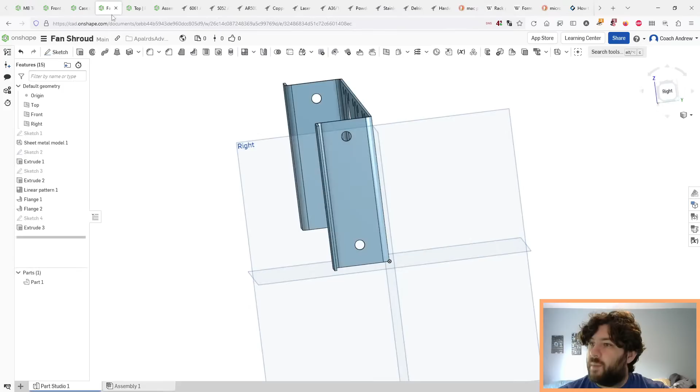Okay, so now time to build a lid. So it's going to be 420 by 430. So I got to remember, I got to keep track of which side. So this is the depth axis. Okay, and this is the front axis. So I'm going to have 2 flanges. Yeah, I know. I've looked at 2U cases, and none of them are that great.

Okay, so you're going to come down. What's wrong with you? Oh, I need to make you sheet metal first. You're not even a sheet metal part. You're just a sketch. Picking. You're going to use steel. Yeah, the whole thing's going to be steel, except for the front panel, which is going to be brushed aluminum, which can optionally be anodized to look like a cheese grater Mac.

So you, sheet metal model. Why did you not resolve properly? Oh, because I didn't pick a sketch. Okay. So then I need some flanges. Who's going to make your case? SendCutSend. These are going to be 20 mils deep.

Perfect. Actually, I need to make you a tad inboard. Partial flange on the front side and a distance of like 5 mils or something. That should be good. Okay, that's an odd looking corner, but we'll go with it. Actually, no, we're not going to go with it.

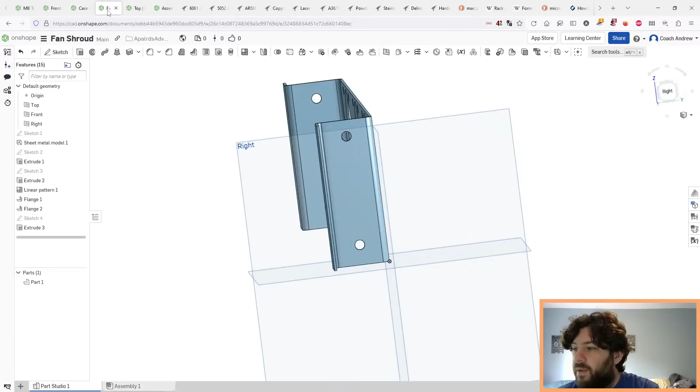So looking at how this fits together. So this is an inside corner. So this face is my 420. So I need to come back about 3 mils in the total length of the lid, not the... so which one's my... you're the 420, so you need to become a 417.

What are you going to make it out of? The front panel is going to be this 2 mil 6061 aluminum, which corresponds to 0.080 thickness. And the rest of the case is going to be 1008 mild steel 1.2 mil, which is 0.048 inches thick. The steel may be powder coated black, or it may be left as is. I don't know yet. And the front case could be anodized, beautiful, or it could be left as is and polished.

Yeah, no, I'm not going to spend the money on... They do laser cutting and water jetting and sheet metal. They do sheet metal, basically. I guess they do sheet stuff.

Okay, so then this needs... So this dimension here, what is the dimension of this hole? So I'm 15 from the front, but I'm cutting off 3 mils, so I'm 12 from the front on the top. Please tell me I got this dimension right. Yeah, I did. Okay, good.

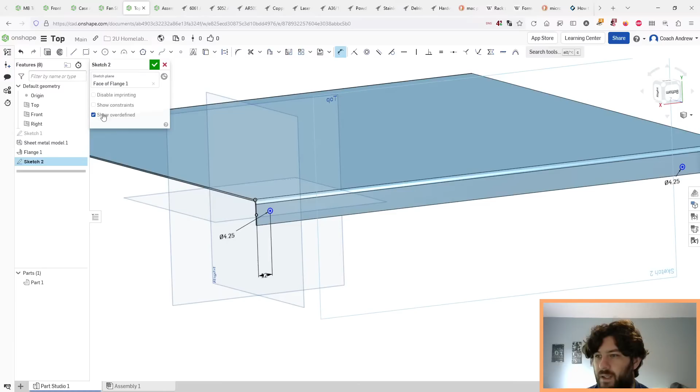So did I make you a... So you're thinking if I want this to nest. I want this to be a nice, good fit. The 20 mil flange. I'm going to put you 10 mils from the bottom, and that'll be tight. I think. One thing I can remember is that holes can always be made bigger. Never forget that. So this hole here, how far is it from the back? 380, okay. So you need to be 380 minus the 3, so 377.

So these are the holes in the lid. And we're going to cut them using the extrude tool. One. Got both of them through all. Okay, that's the lid. V1. I mean, you could paint graphics on it if you want. Let's add it to our assembly. It is top. Okay. What? Oh, I canceled before I hit accept.

Materials should be cheap. Yeah, they should be cheap. SendCutSend has like a minimum price per operation type. So like if it's laser cut, there's like a price per square inch for laser cut material. And then that includes all the holes because they're laser cut. And then the bends, there's like a minimum price to do bending plus like 50 cents a bend or something like that. I don't know the exact prices. But that applies to the whole order, I think. I don't think I pay per part. Maybe it was just for duplicates. I only pay once for duplicates. I don't remember the exact. But it didn't seem that expensive to me for custom machining.

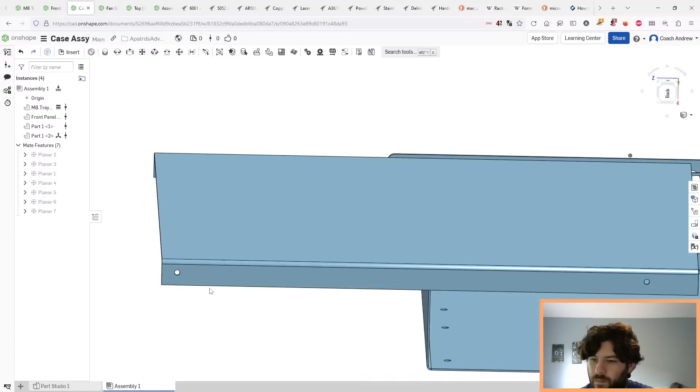So no two of these and no other obstacles in the rear. No, so SFX is thinner. So ATX is almost the exact height of a 2U chassis. And the case that I have now actually is designed to fit ATX. But if you use ATX, then you can't have a side mount fan on your power supply or you can't have clearance. But SFX is smaller. So with SFX, the power supply is in the volume of the case and air can come over the power supply and into the fan. So yeah, no, you can stack them.

Okay, so I want to pick a surface here. Pick the damn surface. We're going to mate you with the back of the motherboard tray. There. Okay. That's a thing. So now I can move side to side. So now I got to stick this sheet to this sheet. Yes, please. Okay. Those holes don't quite line up. Where did a mistake get made? It's just these holes that don't quite line up. Okay, so you guys are different. So you're 10 mil.

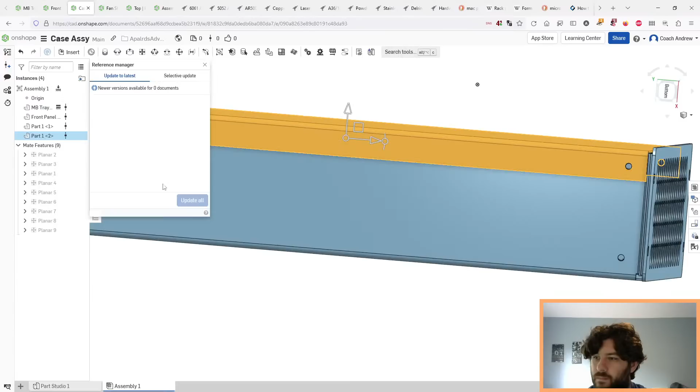Yeah, so that's basically how this is going. Almost 3 hours in, and seems to be working out pretty well. Now the back panel. I've been avoiding the back panel for a while now. So it has to nest into this. So it has to fold around on all four sides and fit in here. And yeah, so let's take a look at that. So let's open the MB tray for a sec. Where did I dimension the motherboard? This sketch.

So I gave myself 10 mils. Not much. But you don't get space for wiring in a little tiny server case. So that's doing pretty good now. Somewhere here I had dimensions. Okay. Just one power supply. So board edge is at 0 mil. 1.1 mil is how much I gave myself for. There is no clearance here. Oops. Yeah, so these PCIe edge brackets like basically touch. So I'm not sure how I'm going to do this.

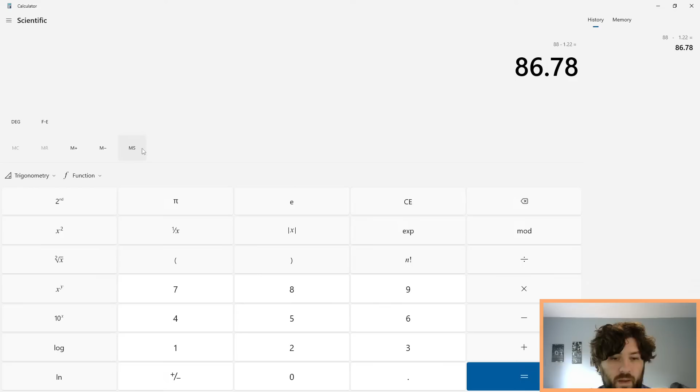So then we have 63.5. We have 22 mils of clearance between the top of this power supply and the bottom surface of our case. So that's almost an inch. I think that airflow is going to be just fine. Either one of these. So SFXL is longer. That'll be fine. I don't think I need an SFXL for the power levels I'm looking for, but see if anyone has power supply mounting hole dimensions.

This is efficiency curves. Power connectors. There we go. Okay. So we have a 40 mil fan. SFX 12V. 50 mil. It's a little bit different than what I was looking for. Yeah, 2 centimeter clearance, and this isn't going to be super high power, so this is going to be a Ryzen 3800 and a 10 gig card and a Tesla P4, which is bus powered. Maybe import an existing backplate design. Yeah, maybe, or maybe not, I don't know. I'm just gonna make it myself.

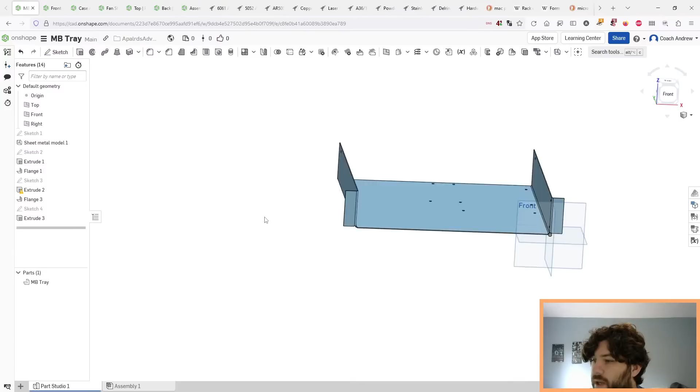Back. So let's do the back. So we need a sketch, front, maybe a rectangle. It's roughly like that. So let's measure. So how wide was this going to be? This was 430 minus the 2 material thicknesses. So I said 427. 427. And this is going to be something like 82 or something. So let's check. How tall did I make these flanges? So there's 84 plus my material thickness plus my case height. So I basically need to be 84.

Okay, so then we're going to turn that into a sheet metal. Select the face. We're going to do steel again because we love steel. I have to bend it out, don't I? Actually, I have options. So here is my back plate. So now I need a set of flanges on some sides. I could just have flanges on the sides and not have them on the bottom. That might be easier. Then I wouldn't have clearance problems, but then I could separate. I should probably have flanges on all 4 sides. How big are you? You can do smaller flanges here because these are such a pain. 2, 3, 4. All of you are going to be aligned outer. You're going to be 16 mils.

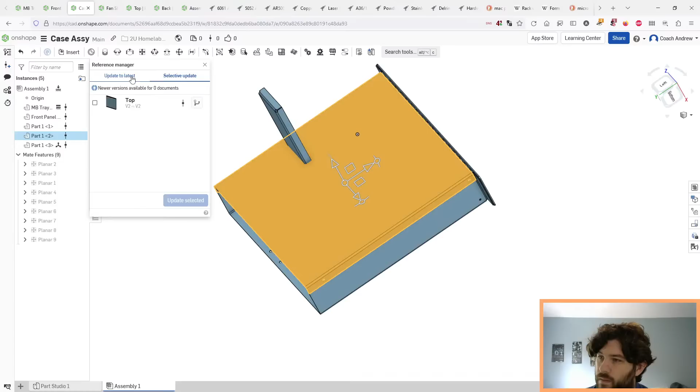Yeah, like that. So the question is, should this side be the inside of the case, or should this side be the inside of the case? No, no motherboard plate. This is going straight to the case. Okay, so I'm going to drop this in. I'm going to give it a version and drop it in, just to see how it looks. I'm worried I'm going to hit these motherboard standoffs here, which might mean I have to do something different. Other documents. Yeah, so this is going to collide with some, I'm going to suppress visibility. If I refresh, is it going to figure out these names changed? No. Okay, so that's the top. So I'm going to suppress that.

Yeah, so if this back piece sits, I think I need to face the back flanges out because I'm just not going to have enough space otherwise. Yeah, so I think what I'm going to do is I'm going to come to the MB tray here and I'm going to move the motherboard holes in by 16 mil. And that will get me space for the back flange to turn out. That is this one. So the MB tray clearance dimension is there, okay. So I need 1.14 mils to the plate. Okay, so we're going to move you back 16 mils. Update. And we will refresh. So that puts that back. So then I can face my flange outward.

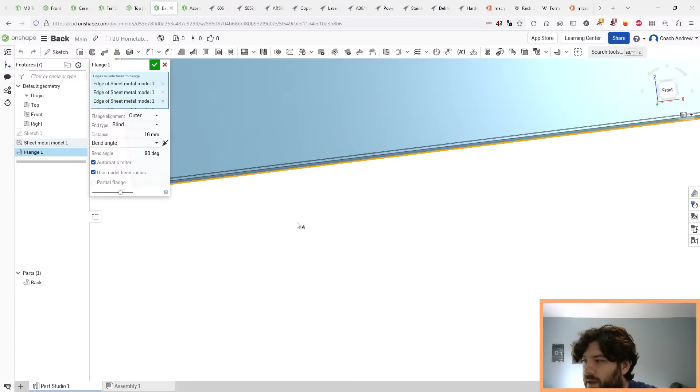Basically, I want to back the flange up so that it doesn't come into that area that it cut away automatically. I don't know, it's like 4 mils or something. Maybe 5 mils. How does that look? What the fuck happened to you? 4? Happy? Not happy. Partial flange. How about 2 mils? Yeah, it doesn't like that.

Why would we delete the flange and start over? So we're going to do bottom flange, top flange. You're a 16 mil flange, and you are going to be 4 mil from each end. I think the problem is when I flange this, now it's going to say there's some material that came out. I can't do it. If I take you like 5 mil in from each end, are you okay? Yeah, that's the problem.

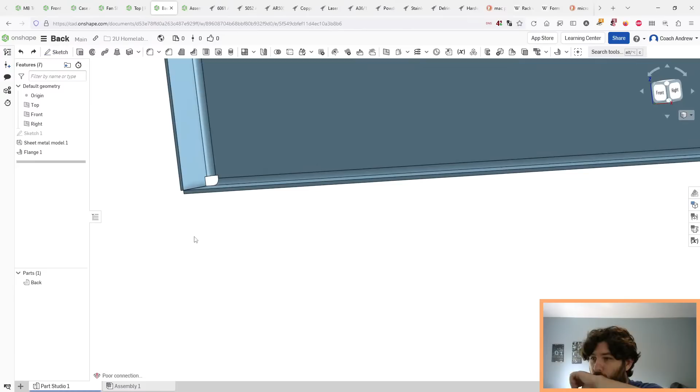Having a hard time computing this angle. I don't know why it's so hard for it. So what I want to do is cut it back to this point here. So it's 3 mils back. So if I partial flange it to 3 mils, there we go. Okay, that's much better. I like that.

So I'm going to come back here. And I need to flush you up. Planar mate. You to you. You're building a case that looks like this out of sheet metal. Basically, that's it. How thick is this total piece on the back? So from you, nope. I need to subtract material thickness, I think. From you to you.

Stop it. Stop clicking things. Okay. So I want to measure from you to you, 16.15 mil. It is 16 mil from the bottom, okay. 30 is going to be from the top. Okay. So let's version this because we made changes. Where else do we make changes to?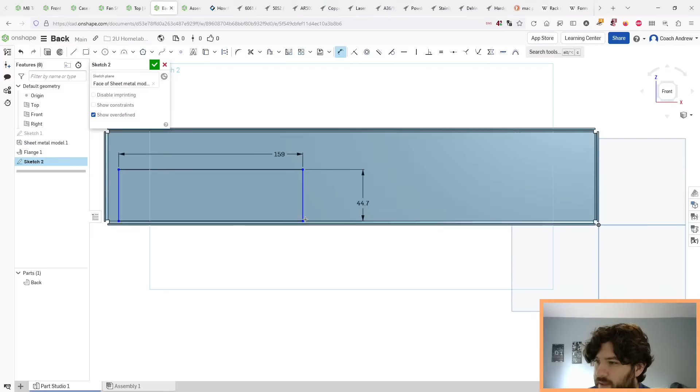So your cutout needs to be 44.7 tall. I'm going to drag this tab over here. 44.7 tall, and you are 159 width. Actually, there's a constraint somewhere that's not right. You are locked. Oops. Let me sketch on here. Need a rectangle.

Phone is ringing. Shut up.

Yeah, so my thought for the hard drives was to put some PEM nuts on the bottom and then design 2 separate sets of brackets. One that can hold hard drives, one that can hold SSDs. And then I can use one of those 2 brackets, basically. 159. And height is 44.7. So you need to be, go back. Stop it. Open image in new tab. There we go.

So post. I'm using the 0.375 inch threaded post length. So that's off the bottom surface. Takes me up to the motherboard. So the cutout needs to start at 7.30 millimeters from the bottom. So you need to be here, 7.30. And then in the other dimension, I have to figure out what the dimension is. It's 10 mils. That's what I gave myself. No, but it's minus the material thickness. Oh my god, material thickness. So you're 10 mils from...

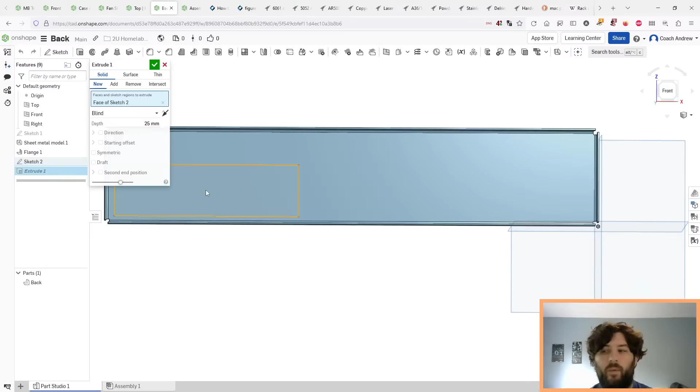There. Okay. Does that seem right? I open my sketch for the motherboard tray. How much space did I give myself? I gave myself 10 mils from the outside. Okay, that's right. So that is the cutout for the motherboard. For the, not the motherboard, the I/O. Motherboard I/O.

Okay. So now I version this so I can import it in the other one. Get it all, and it's probably going to be in the wrong place. Oh, it's right. Perfect. Okay. There's always a chance that you had constrained it, flipped over or something. Okay. So motherboard shroud goes there. So now I need 4

PCIe slots because that's how many you get with... How much memory do all these Onshape tabs use? Let's see. Firefox is currently using 5 gigabytes of RAM. Actually, what's using all my RAM is DaVinci Resolve. We're going to yeet that one out of here for now. Fuck off, DaVinci Resolve. Okay, that's much better. Onshape is not outrageous. It's surprisingly efficient.

Okay, so then we have to start these cutouts here. Ooh, so these tabs actually stick below the... How much do they stick below? Oops, go back. This one I already have open, isn't it? Okay, so that's the cutout. Do these actually stick below? Or not? Because I don't have space for them to stick below. They gotta sit in the case there. We'll figure this out. I'll sand them if I have to.

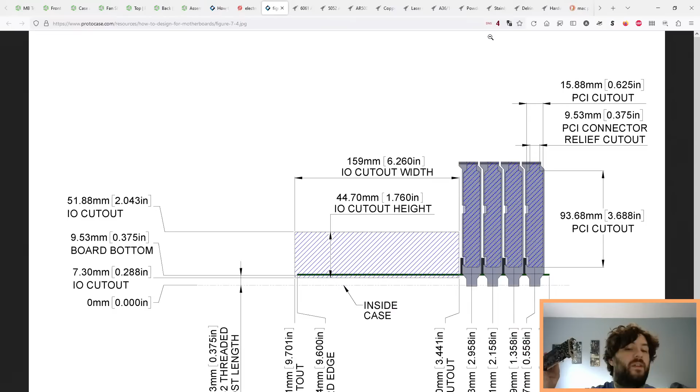And the chip it uses is made by Annapurna Labs, which is the same company that Amazon bought to make their AWS Nitro cards, which are the hypervisor offload cards. So this could be used in a data center to do VXLAN tagging and untagging. So if you sell a bare metal server to a client, you could have this do VXLAN for your virtual networking. Or if you're coloing, you could use this as your router so you don't have to have another router if you don't want to do a software router. I don't exactly know what they were thinking, but I bought it and I'm going to use it. You can also use it as a 25 gig card too.

So the motherboard, I have that open too, is this guy. So we have a blank space, 2, 3, blank space. Yeah, so I could put a dual slot card in the bottom. Let's put 5 slots. So I need to figure out this dimension. That current dimension, that's 93. I have a feeling it's going to be closer to 60, 70. Yeah, so to where it starts to neck, I'm measuring 68 mils from the bottom of this on my real card here. So that's what I'm going to use as my dimension.

That is this piece. So we're going to sketch again on this face, and we're going to make a rectangular hole. So we're going to be 68 mils tall. 68, that's got some clearance. What's our width? Relief cutout there, 15.88. Okay, so that's our PCIe clearance. That is quite big. That includes what they call the relief cutout here, though. Yeah, so we can do routing. Seems wide.

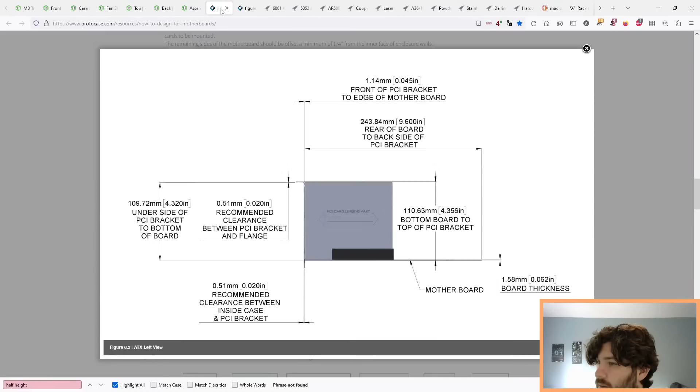Where is that in the picture? From this cutout up to there, that must be another figure. That lines up with the motherboard, doesn't it? No, that cutout doesn't. The card does. The clearance cutout does not. What is this dimension here? 8 mil. Okay, 8 mil off the surface of the board, which is 8.06 mil off the board.

So this to this, 8.06 plus, actually this goes in the wrong direction. This needs to be up here. So here to here, I have 8.06 off the surface of the board, plus the difference between the board and the I/O cutout, which is 9.53 minus 7.3. And that seems off to me. That takes me out of the top of the case. That does not seem right.

8 mil. Is it that high up? Oh no, that's the clearance. Okay, so no, I'm going down to 0. Okay. I'm giving myself more clearance here. Look at the real one. It is a bit up. It's quite high up. Okay. So I might have to change this design a bit. It does not go past the bottom of the case. It touches the bottom of the case.

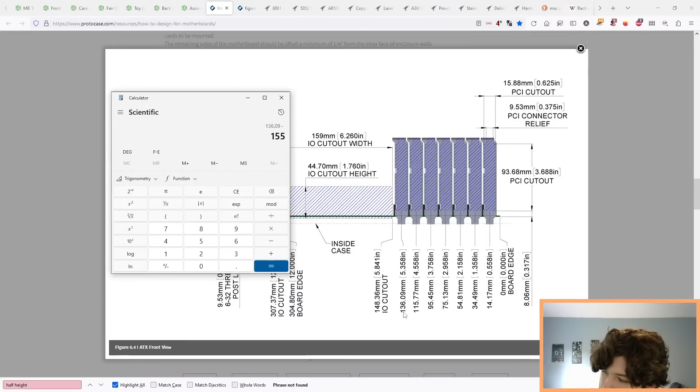Now what is the spacing of the cutouts? This extrude and that fillet need to get linear patterned. We're going to feature pattern, and we're going to feature this and this in this direction. What is your spacing? Math. So you are 136.09 minus 115.77. 20.32 is the pitch. And we're going to have 5 of them. There we go. Cutouts for the brackets.

Next up is the screw mounting for the brackets. So this one is going to be tricky. I'm not sure what I want to do with this. Does the card bracket go past? No, it doesn't. I already answered that. I'm going to break everything. Actually, I'm thinking of how I want to do this. I think I want to carry that hole through the cut, fold it over, and have room to screw the cards in. I don't think I can tap this material thickness.

Let's ask. So 1.22 mil, you cannot get tapped. What if I go up to 1.5 mil? Okay. Maybe I should make this part 1.5 mil then. What is that? 0.49, okay. Just so I can tap it. Sheet metal model. Copper, 1.5 mil. And what's your bend radius? 2.84. Okay, did the model fix itself? Yes, it did. Okay. So now I have a material that I can tap.

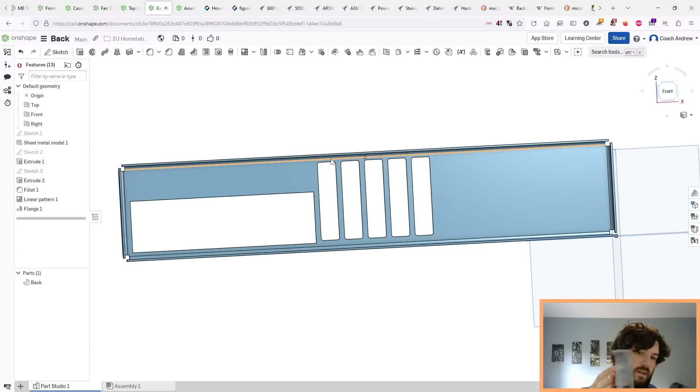Yeah, so I don't know how wide; the flanges have a bit of an odd geometry to them. Like if I look at a PCI bracket, it's not straight head on. It has a little side jig to it. I don't know if you can see on camera. So instead of keystone, I could just get some PCI brackets and put them in the PCI slot. Oh no. You need to come from this side.

Okay, so next up, I'm going to cut down out of this. Oh, fuck. Let's see what the bend tool likes. Because I kind of want to bend it, like I want to do a cut here and a cut here and then bend that whole top over, and carry this cut with me. Bend relief. So what I really need to do is do this cut after I do the flange, I think.

So what is the thickness here? So like from you to you, I got 6.7 mil. So I need to bring the top down 6.7 mil and then bend it. That'll give me a space for this bracket. Oops. You're not a part sketch. Okay. Yeah, like that. And then I want this to be from here to here. Needs some material space. 14 mil. I'll do the same on this side. 14 mil.

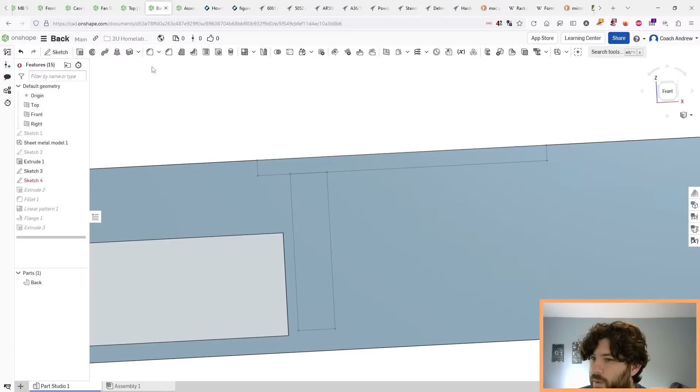I move you up before these guys. And we're going to do a cut. I need to generate properly. Oh yeah, you're right. Math. I gotta do math. Fuck. Okay, now you regenerate properly. Oh, depth. There we go.

Oop, I want to do that extrude. Nope, I want to move you up here. You down there. Okay, so now I can put a flange here. First I can put 2 flanges on the side. You and you. You're going to be a 16 mil flange. Your bend is an outer. And you are partial by 3 mils. Okay, so that kind of fucked up in the inner, but that's whatever. Okay, so now I can flange this. Oh, no, you don't need a partial on the other side.

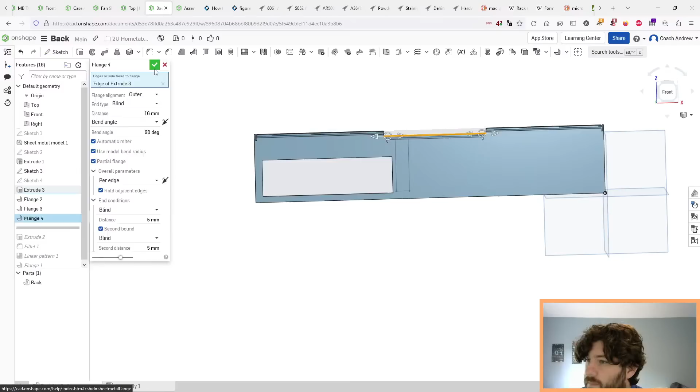That's a really bizarre looking cut, but I think the machine can do it. So what happens if we do this? Oh, that's beautiful. I like that very much. I don't know if the machine will like that, but I like it. Fillet. Yeah, fuck the fillet. Whatever. And we're going to get rid of that feature. Why is it pissed? 20.32, okay.

Pattern. Where's my pattern button? There it is. Run a pattern. Feature pattern. Pattern the extrude, or a direction is going to be that way. Maybe 5 of them. Are you like not patternable or something? Hmm. So to use the PCI card, sit on this and then screw down.

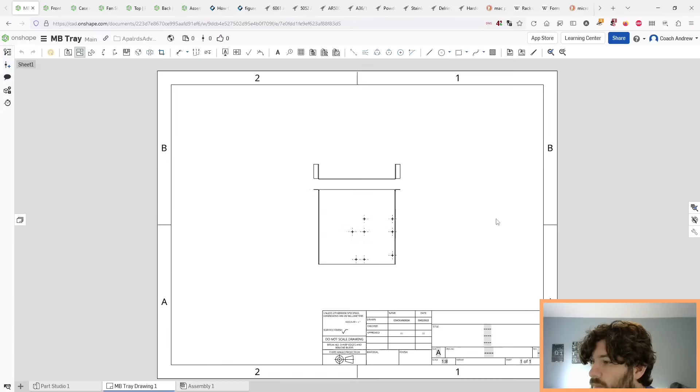I'm curious what my total cost is so far. So I'm going to save a revision of this. Oop, I guess not. It's broken. How much is the motherboard tray? Can I export you? What I really want is to export the sheet metal.

How do I get the flat pattern? There's a view for this. I'm not an Onshape expert. Oh, this. There we go. Export DXF. Okay. DXF.

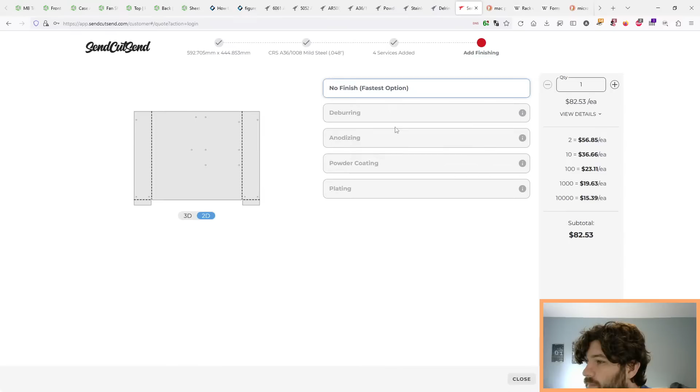90. 90. 90, 90. There. That is not right. That's better. Okay. No finish. Nope. Hardware. So these guys get... There's 2 different pieces of hardware. These guys get the PEM nuts. M4. And these guys get the standoffs. The number 6 by 375.

How many of you guys are there? Supposed to be 8 of you and 2 of you. Yeah, that's right. Okay, these guys are the standoffs. $100 for the motherboard tray, which is the most complicated part. If I buy 2 of them, it is very significantly cheaper. Okay. I'll add that to cart.

Next up, the front. Oh, I timed out. This one, we are going to flat view. I'm going to export you as well. So we can come back here. Front panel, this one's going to be aluminum. You're doing 6061 2 mil. Okay. Metals, aluminum. Is it cheaper? $50. $74 for 6061 or same price. No hardware, no bending, just cutting.

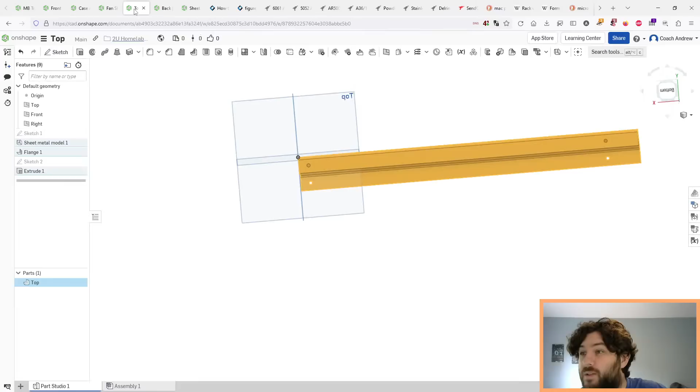The back panel, though, is what I'm going to struggle with. And the top. It's probably going to be kind of costly because of how big it is. So we got a DXF, more drawings. Top. Yes, metric. Steel. 48. Bending. No hardware. Finishings. They do allow powder coating, so gloss black. How much is that? So I go from 59 bucks to 185. Fucking hell. Okay. Maybe I should powder coat it myself.

Add powder coating to you and see how much that is in my total cart. Yeah, so it's too big to powder coat. That's the problem. They have a limit on size for powder coating. I'm going to get rid of powder coating on you too. I'm just going to go bare steel. I guess I'll paint it myself. So again, I get 2 of them. It's way cheaper to get 2 cases instead of 1.

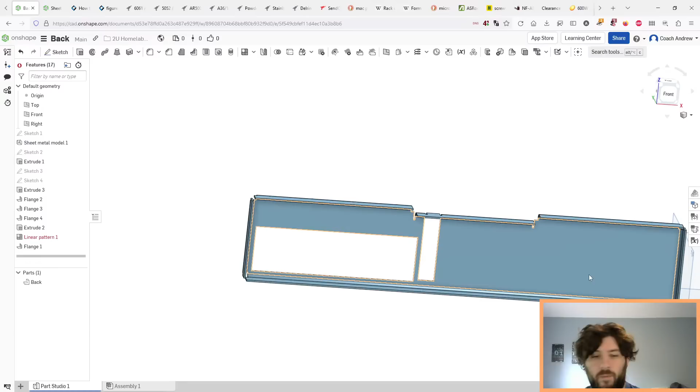Probably across here, and then this will have the PCIe bracket, so probably no ventilation there. Then probably a bit of ventilation here, and then the power supply. So that's how it's going to look when it's done. So where were we at? Yeah, so this is the whole case. By turning this back on, this is what it looks like. So this is going to be aluminum. Can I set material for you? Like a render material? I don't know. But anyway, this is what it's going to look like.

So it's going to have this beautiful brushed aluminum front. It's brushed. And then behind the brushed aluminum front is the fan shroud that is structural but also holds three 80mm fans. And I was thinking about just putting a fan grill on each of them, that I buy. So then the dust is around the fans here, and I can take the lid off and vacuum it to clean it. That way I don't have dust accumulating on my beautiful aluminum holes here. Then on the inside, I obviously have the motherboard and stuff. On the back plate, I have the outgoing air. Yeah, so that's basically the plan.